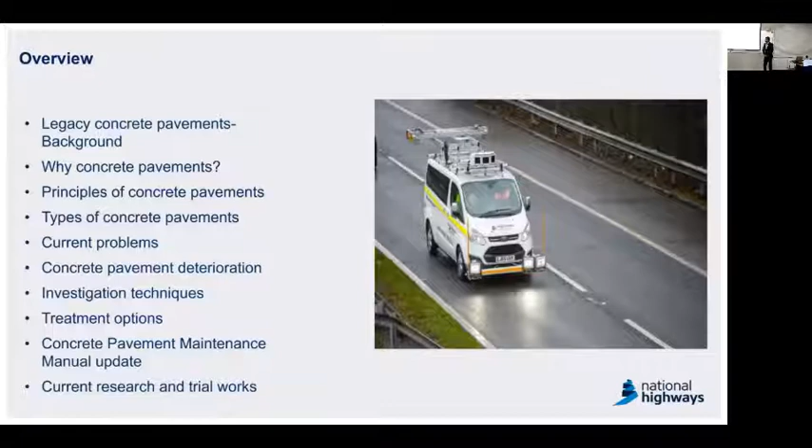My colleague Michael has talked a bit about this, so I'll keep it short. Rigid pavements compose about 4% of our SRN, either in the form of exposed concrete or maybe having a little bit of asphalt overlaid onto it. They're all built between the 1950s to 1985, so at an average of 50 years old. The rigid pavements we're talking about are almost to the end of their service life, or even gone past the service life.

The various types of rigid pavement we have in our SRN are jointed unreinforced concrete, jointed reinforced concrete, continuously reinforced concrete pavement, and continuously reinforced concrete base. The map on the right-hand side shows the extent of concrete pavement along the network.

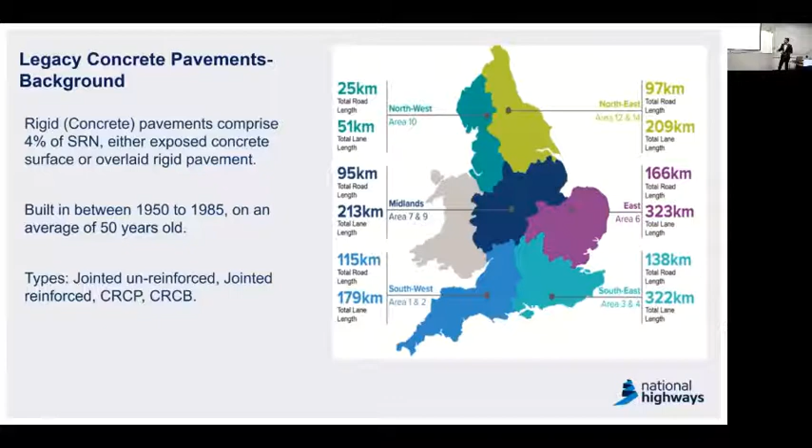Moving on to why do we need concrete pavements. Concrete pavements are actually good, I like it a lot. It's relatively more durable than flexible pavements. It can be designed for 100 plus msa, and concrete pavements are particularly suitable for areas where we expect differential ground settlements or geotechnical issues. Concrete pavements also require less maintenance over the service life, which is a big thing for us. It is relatively less prone to wear and surface distress compared to asphalt pavements, and it has improved rolling resistance, meaning it's likely to have less CO2 emissions compared to asphalt pavements.

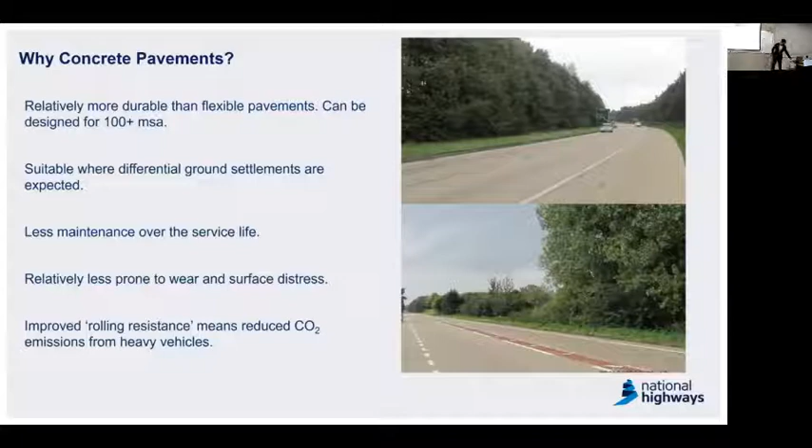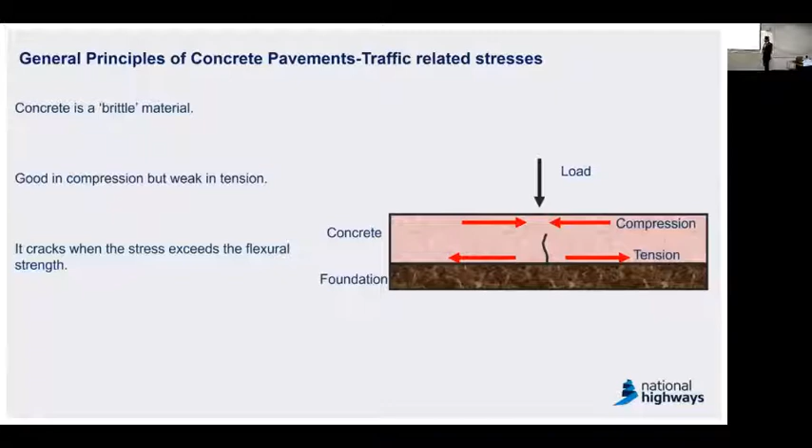I'm going to talk a little bit about the general principles of concrete pavement. Concrete is, as you may be aware, a brittle material - it's quite good in compression but weak in tension. It just cracks when stress exceeds the flexural strength. This is about traffic-related stresses. Not only that, the concrete tends to contract and expand due to thermal changes, and again it cracks at random places.

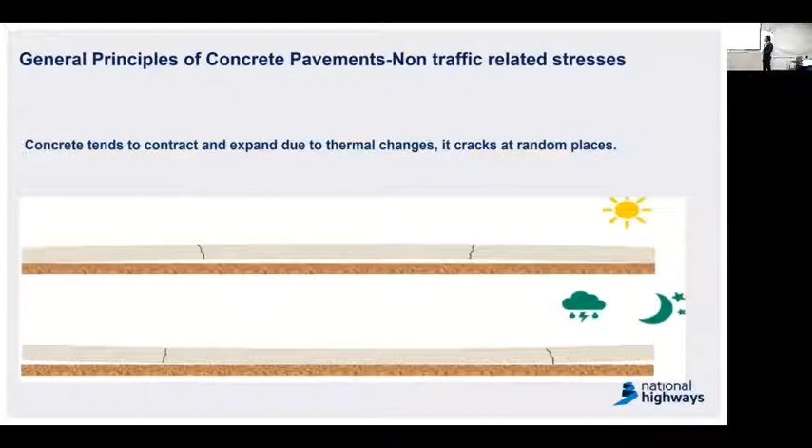So what do we do about it? In general design practice, we have a couple of options - you can either have it as a reinforced option or unreinforced concrete. The first one is unreinforced: what we do is induce cracks at regular intervals and seal them at the top. We need to provide dowel bars for load efficiency, to transfer the load between one slab to the other. That's your unreinforced concrete.

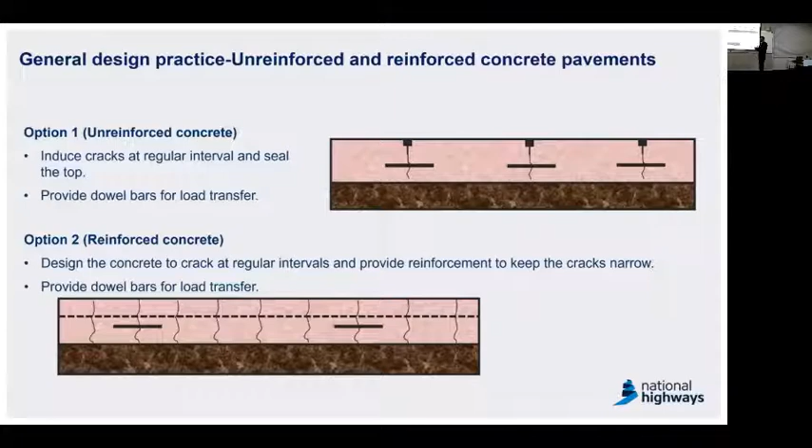The second option is something called the reinforced option. Basically, we design the concrete to crack at regular intervals, and we provide reinforcement to keep the cracks very narrow. We still need to provide the dowel bars for load transfer. That's your reinforced concrete option.

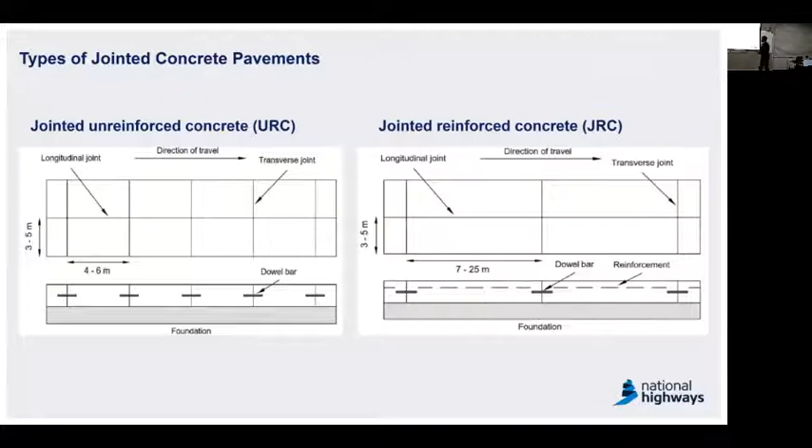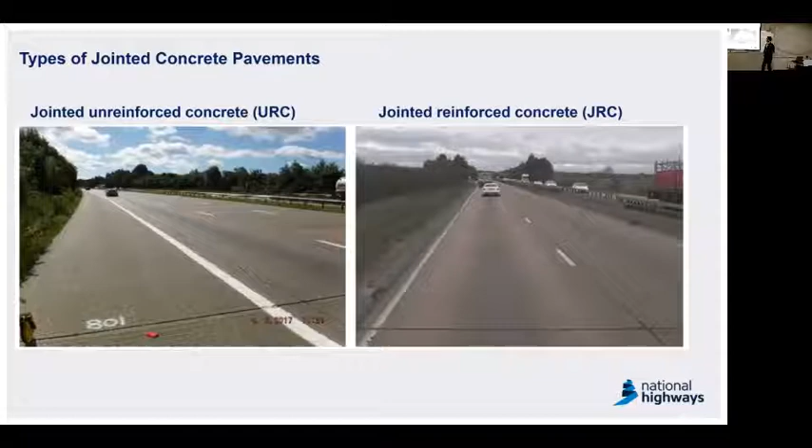These are a couple of photographs of what they look like in real time. On the left-hand side, you'll be able to see the joints on the bay - that's your unreinforced, you'd expect about 4 to 6 meters. This one on the right is our jointed reinforced concrete, which you'd expect to have 15 plus meters for each bay.

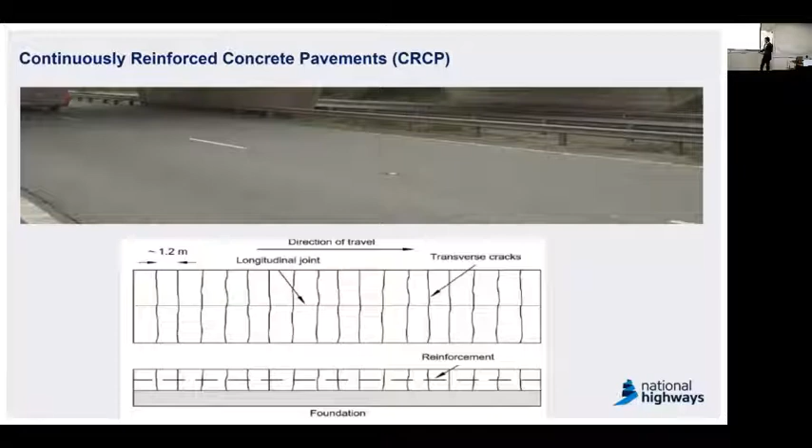So this is the current practice, this is our standard, and it's quite effective, I would say, because it can last very long with little maintenance if it's properly looked after.

So with that background, how is it going for our SRN, the strategic road network? To be honest, as Mike discussed, most of the pavements have gone past the service life. It's 40 plus years old now. We had this privilege of having less maintenance over the design life, and now it's coming to an end. We've gone past 40 to 50 odd years. In the last 10 years or so, we only had a little maintenance or even no maintenance in some of the sections.

The reason being, it's very expensive to maintain and often outside the regional maintenance budget. So the focus was mostly onto asphalt pavements. Now we are coming to an end, we are in a state of need for maintenance. Also, it's very highly disruptive to road users because you need extensive road closures compared to asphalt.

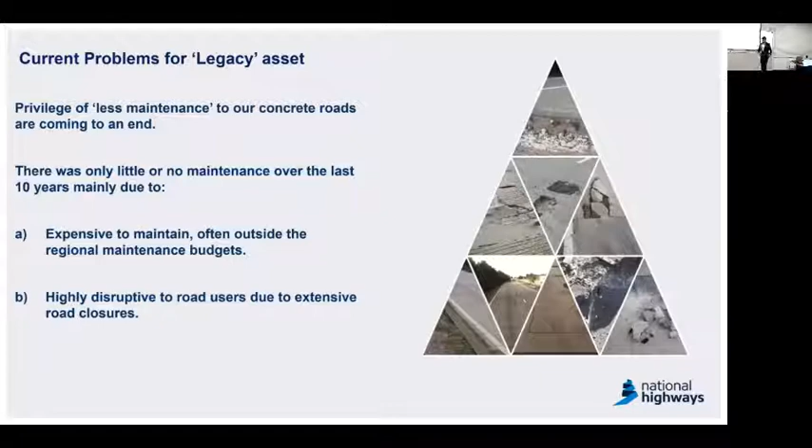So I'm going to be showing some of the concrete pavement deterioration examples. Please bear in mind what I'm showing you here is pavement which has gone past the service life. This is not something you would see everywhere in our network, but there are some pavements which are failing really bad. Some of the examples are here.

So you can expect to see mid bay cracking. These are all structural defects where you do need to have a proper intervention for it. We have a longitudinal crack on the near side wheel path, and this one is a shattered slab.

And the other one, these are quite common, you can see them on the joint of the concrete pavement. These are big joint spalls. The likely cause for these things is possibly issues with the dowel bars, corroded dowel bars, or maybe localized soft spots on the ground on the bearing support.

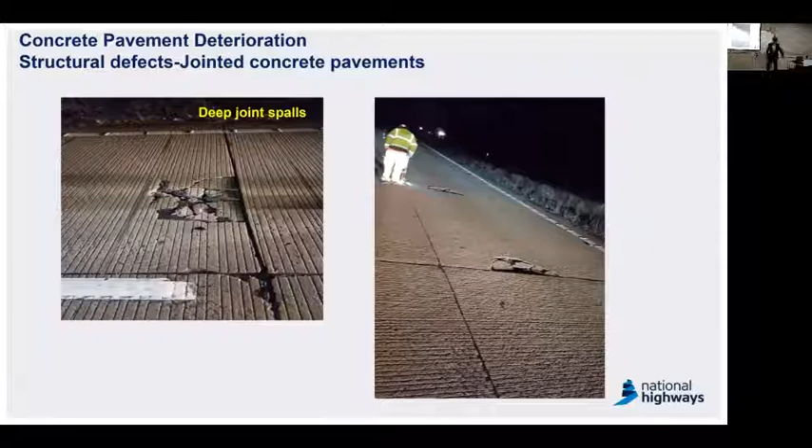On top of it, you do have your traffic and environmental conditions which could lead into these sort of defects. So the potential causes for these, again, it's traffic and the environment, and also it's likely to have some loss of localized support.

Another issue we need to be looking at is potential drainage issues. Even though it doesn't matter how good your concrete pavement is, if you have issues on the drainage, if you have water seeping into the concrete pavement or even asphalt, you would still expect to have poor subgrade conditions that could lead to pavement deterioration eventually.

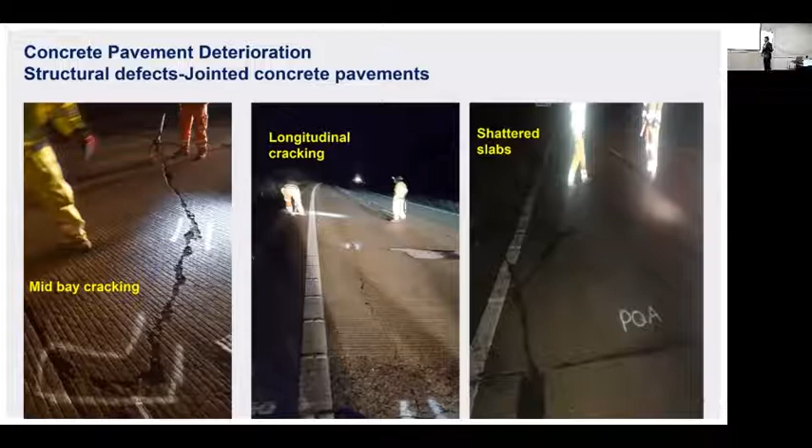So the repair that we are looking at is actually patched up with some asphalt, mainly for emergency reasons, but that's not the proper repair. So it has to be followed up with a treatment option.

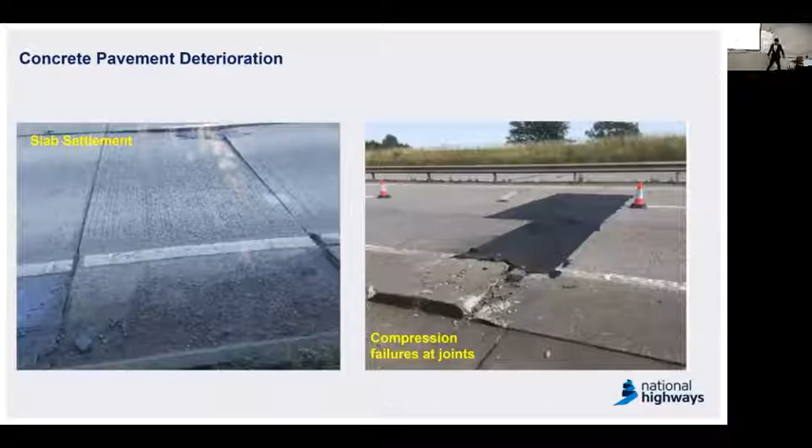The next defect is unique to reinforced concrete pavement, specifically continuously reinforced concrete pavement. These are called punch outs, where you would expect to see closely spaced transverse cracks that connect with longitudinal cracks, resulting in defects like this. These punch outs can at some point even become safety critical, so they need to be dealt with properly.

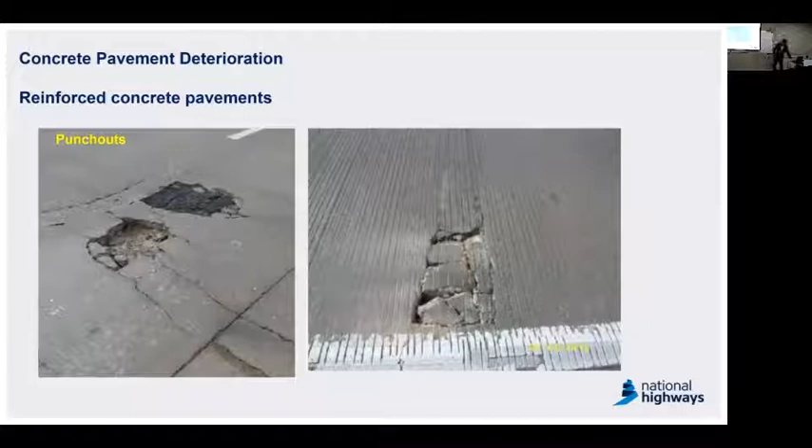Apart from the structural defects, there are also other minor surface defects, such as surface pop-outs, crazing, perished joint seals, and shallow spalling. For crazing, early bleeding in your concrete mix, poor curing, or other curing issues can contribute to both surface pop-out and crazing. For perished joint sealant, it's mainly the age of the sealant material; if not replaced often enough, this can lead into issues. Shallow spalling is mainly a superficial defect.

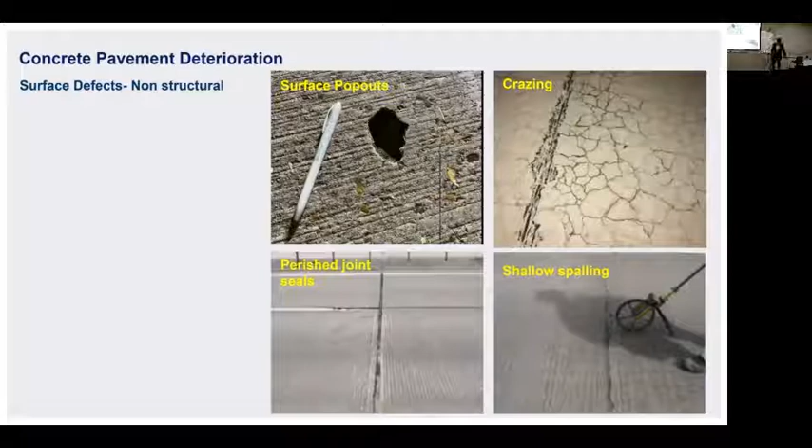Now I'd like to talk a little bit about the investigation techniques. Michael has discussed the advanced end-to-end digital methods, but these are the very basic points we normally use for investigating our concrete assets.

The one on the left is a visual conditions survey, carried out at traffic speed, which allows us to capture ultra high precision photographs of your network, corresponding to your map so you can see exactly where you are.

It also comes with another feature called GPR, ground penetrating radar. This map shows the relative thickness of different layers of the pavement, so it's quite easy to get the condition of your pavement using the traffic speed automated vehicle.

The one on the right-hand top corner is the usual old school technique - we take a core sample just to understand the material, its thickness, and what sort of defects we're looking at. That gives you that kind of information.

The one on the bottom left is called the falling weight deflectometer. We use it widely on both asphalt and concrete. For concrete, we mainly use it to understand the load transfer efficiency between the slabs. Once you have a joint in between, it's important to understand how exactly the load is being transferred from one slab to the other, because dowel issues or loss of support could lead to poor load transfer, meaning each slab becomes isolated and starts to deteriorate faster.

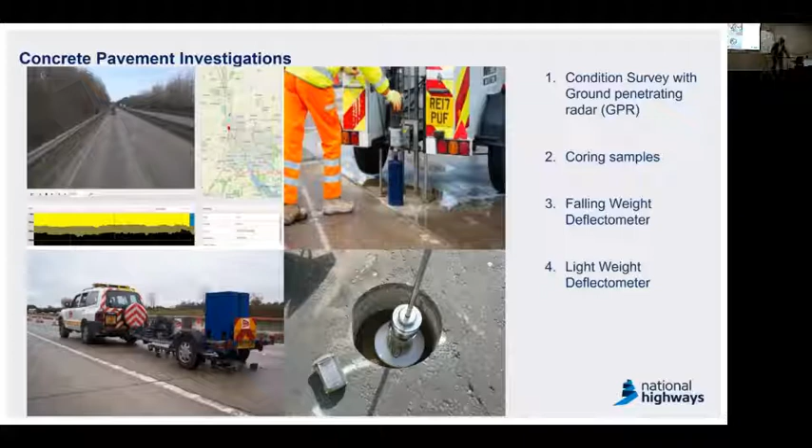With all these investigation techniques, it's quite important to work out the root cause for individual defects. There is no one-off treatment that fits everything, so it's really important to determine the root cause for each defect, and then come up with a maintenance strategy.

Now I'd like to talk about common treatment options. For treatment options, the first one on the left-hand corner is inlaid crack repair systems. For example, if you have a crack, you could use an inlaid crack repair system, which basically involves an emulsion - that's one system you can easily use. The second one involves using calcined bauxite on top of that emulsion, mainly to improve the skid resistance for that particular patching.

The one on the right-hand side is shallow repairs - for example, if you have a very superficial defect that still needs to be addressed, you'd be looking at around 20 to 40 mil deep. That's your shallow thin bonded repair.

The one on the bottom corner is slab stabilization by vacuum grouting. This is mainly for scenarios where you have slab settlement and find a potential void under your slab - this technique can be used to stabilize the slab. You force air to create a vacuum, then use either a resin-based or cementitious mortar to stabilize the slab. That's one of the advanced techniques we still use.

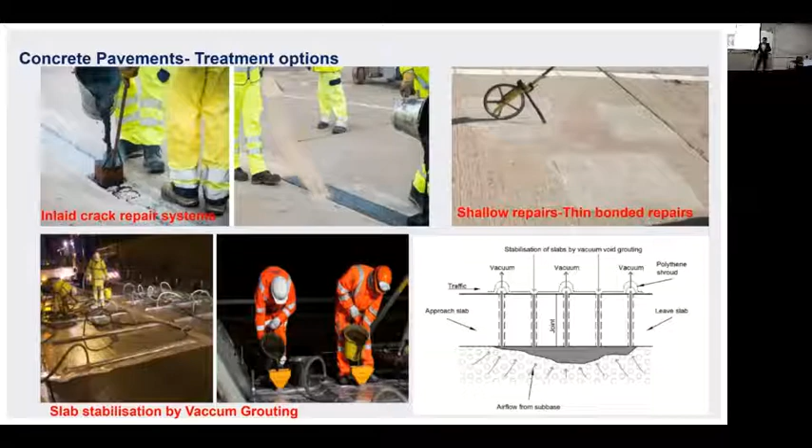These are very intensive treatments. For example, if you think about the shattered slabs or mid-slab cracking, those are scenarios that indicate the particular slab couldn't go any further. In those cases, you should be looking at deeper treatment, either a reconstruction or even a bay replacement.

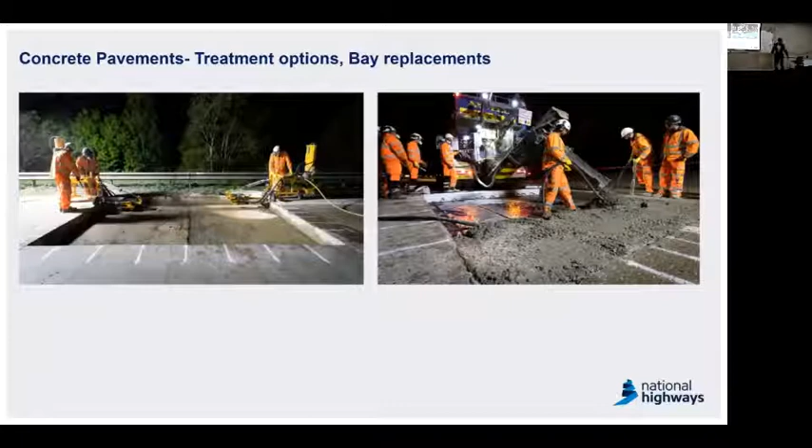Just to summarize some of this - as part of this legacy concrete program work, we have updated our standards as well. The link on top is our specification link. Based on our experience and research so far, we constantly update our works, so I'll just summarize for ease.

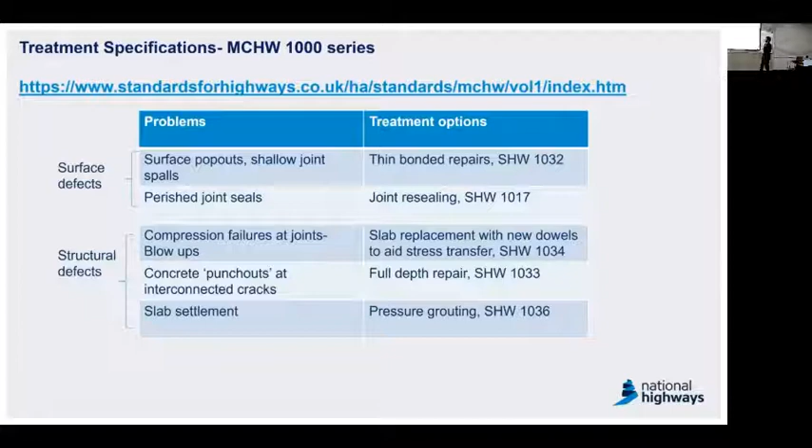If you have a surface defect, there are a couple of options within the specification which are recommended. For surface defects, you can think about thin bonded repairs, and joint resealing for perished ones. Structural defects are the common ones. These numbers on the right hand side are the clause references to that specification 1000 series. I hope that was a useful link for you.

Followed by that, because the legacy concrete program, as Mike mentioned, is going to run for the next 30 to 40 odd years - for the last 10 years or so we never had a proper maintenance strategy for the concrete, so it's going to be a long journey. Then we started to think about how we do it.

Then we came up with a project called the Innovations Project. We reached out to the industry and asked them, because the technology has advanced quite a lot in the last 10, 20 years or so, and we haven't done much work on concrete. We got up to the industry and understood about lots of technical advancement in concrete materials, and asked them to trial it on our network.

We then tried quite a lot of different products, and we also tested a number of different non-destructive testing methods and different treatment options. Then, before we actually went into our work, we wanted to update this huge piece of concrete pavement maintenance manual.

This was initially published in the early 90s, and now we've managed to update it quite substantially. It's about a 300 page document. It covers quite a lot about concrete if you're interested - it talks about the mechanics of concrete pavements and deterioration, and lots of advanced investigation techniques and treatment options if you're interested. There's a link in it, and you can feel free to download a copy - it's free of cost for you.

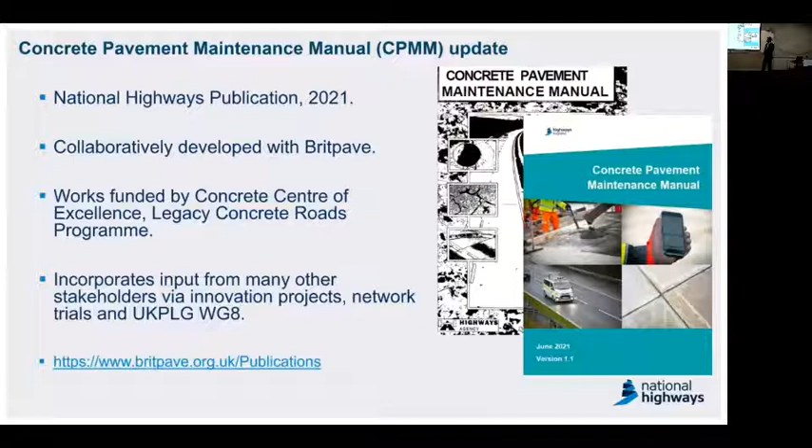So I want to now talk about the research and trial works that I'm personally working on as part of the team. The first one is actually the project I'm working on with Professor Abir, which is on low carbon concrete with self-healing properties.

Self-healing is something that's been explored quite a bit for the structures side. It's been tried for concrete to some extent, but it hasn't been tried for concrete pavements. So the idea is we wanted to understand what different self-healing options we have and how they interact when it comes to concrete pavements. For example, you could have capsules, fiber reinforcement, mineral additives, or SAP, super absorbent polymers. The fourth one is kind of my favorite because it absorbs moisture and tends to expand, which is possibly a healing option for minor cracks.

The outcome from this research - I'm not expecting it to be a huge rehabilitation option. It's going to be more of a first line treatment for initial cracks within the concrete. So that's one of the projects.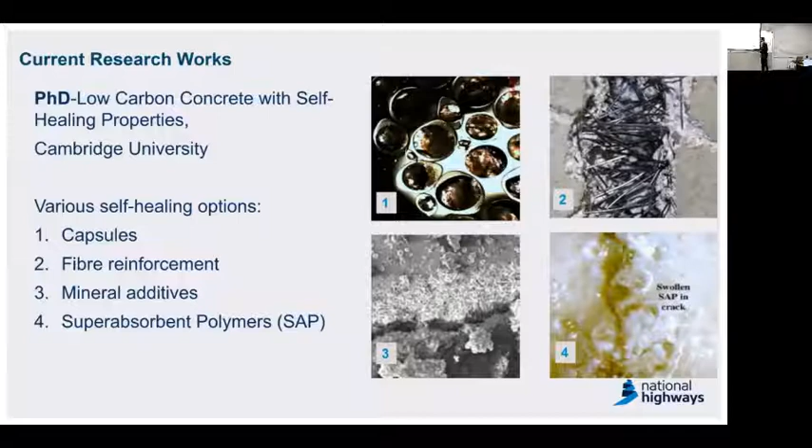The second one is working along with Nottingham University. This is mainly for drafting out the deterioration model for concrete pavements. The deterioration model will definitely guide us, because our network is huge and we have lots of different schemes for different regions, so we wanted to prioritize where we want the spending to be. The deterioration model, hopefully the outcome will give us guidelines of where to prioritize our investments.

This work is expected to cover both the exposed concrete as well as the deeper concrete sections we have on the network.

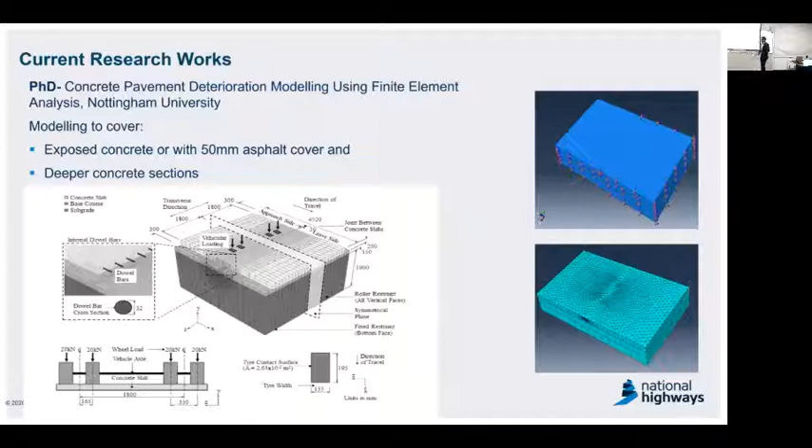That's the last one I was working on this last week. As we all know, concrete is quite noisy and sometimes it's very unpleasant for road users. So there are a number of different techniques coming through. We already have something in place, but this one is a new technique.

So basically, it improves the skid resistance, and it's relatively quiet compared to standard concrete road. It's still at the early stages, and I found it to be very interesting. If it can help reduce the noise, it's something we would like to explore further. So this is one of the recent works.

Yeah, that's about it really, just to give you a flavor of what we do. So I'm more than happy to take any questions.